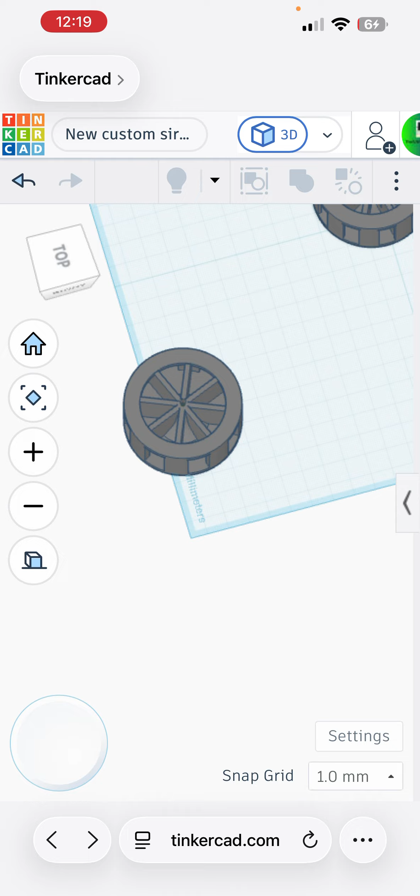But here we are, episode 2. Last episode we modeled the 8-port rotor - I almost said 10-port rotor. This time we're going to model the stator.

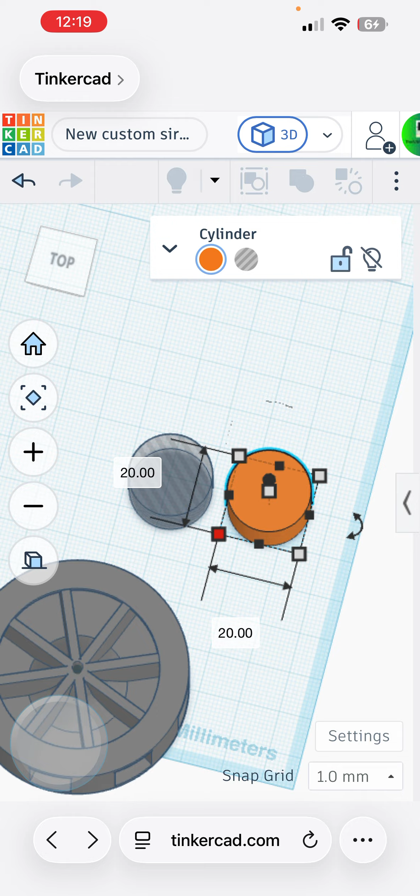Yay, wrong thing to grab. I'm just going to get the size for the actual stator walls and then the hole for the rotor to fit in.

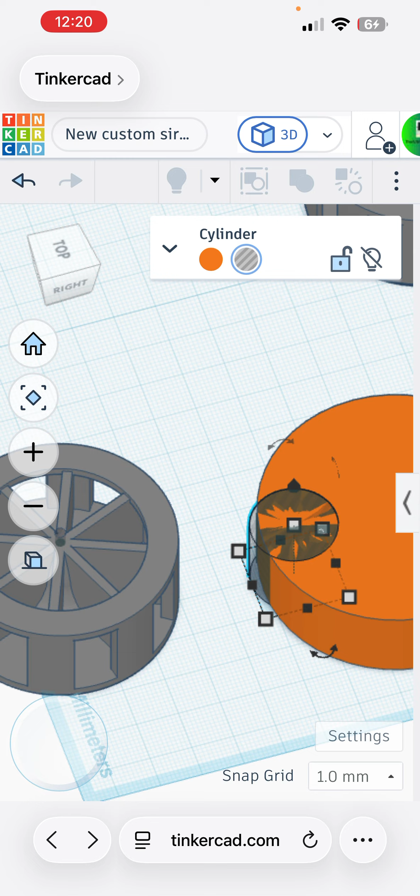I forgot what I was doing. All right, I'm just gonna have this 63 by 63 for fun, and also because of how big the rotor is. Yeah, 53.5. I have this 56.5 or something. Yeah, 56.5. We'll see how that goes.

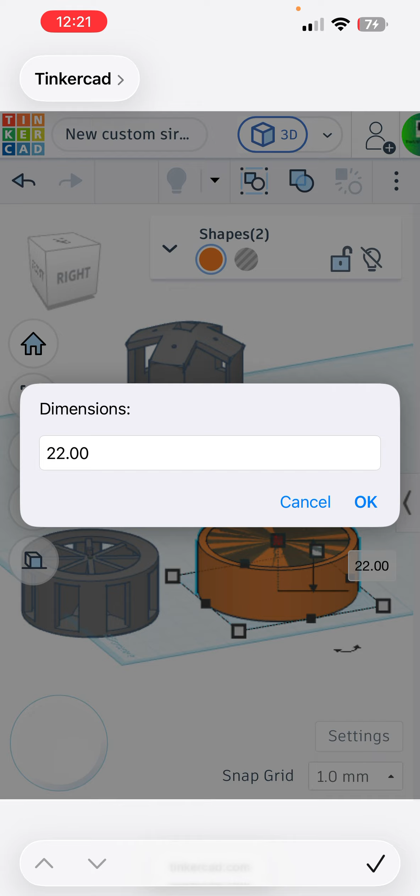I think the height was 22, okay. And my stuff froze. Oh, Lord.

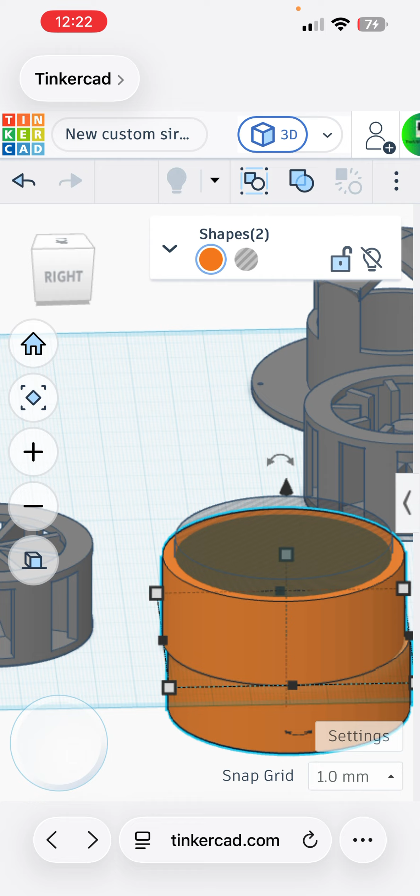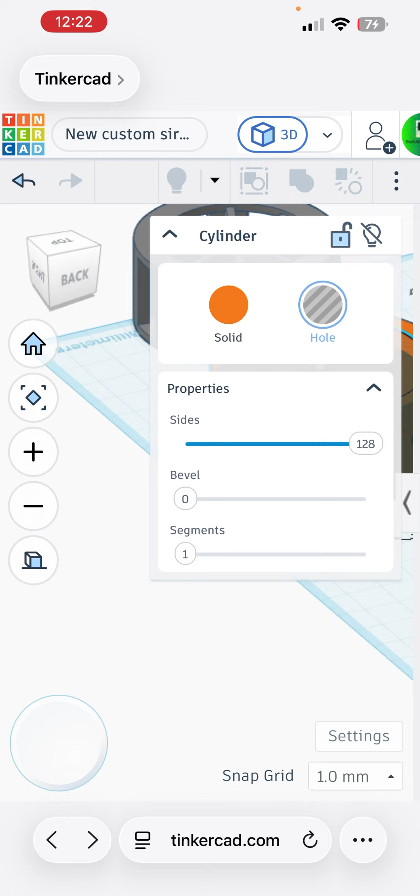Okay, so that is the base, and of course, I have to do this before I forget again. Remember last episode when I forgot to... I'm sorry, what?

Okay, so apparently I accidentally moved it. Oh my god, hummingbird, and I missed it. Hummingbird! Okay.

So, yeah. Currently I'm chewing gum, so I'm not going to be talking as much. So, yeah.

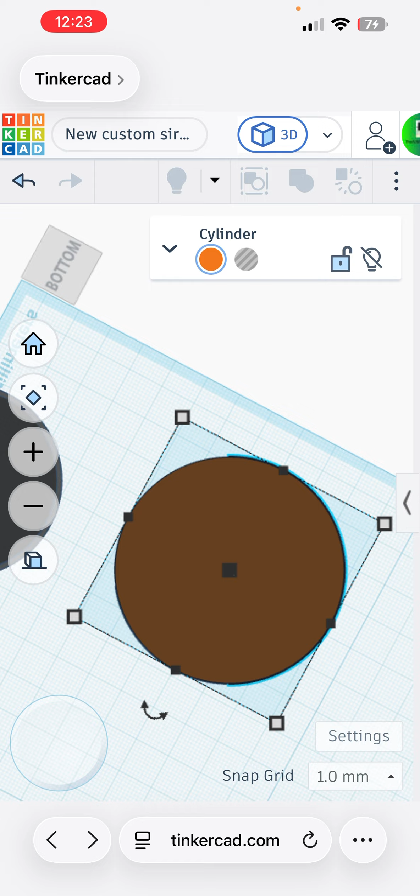Since the stator is practically done, I just gotta fix the size of this. I'm probably going to make it slightly larger. You know what, I'll have it the same size as it is currently. I'll just bring this down to like 25.

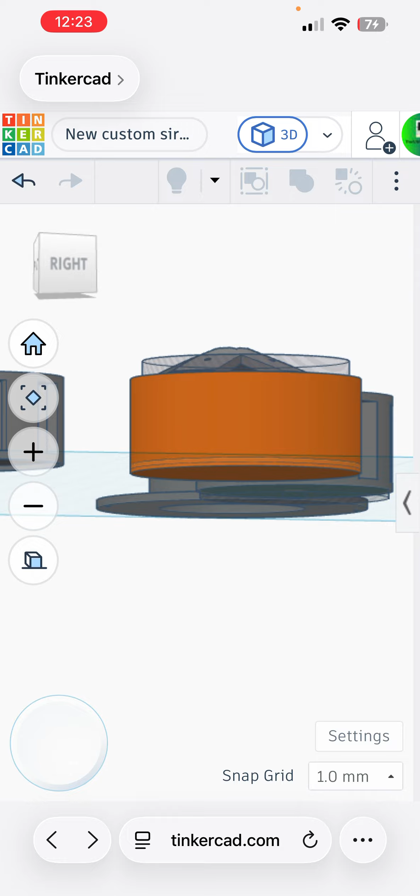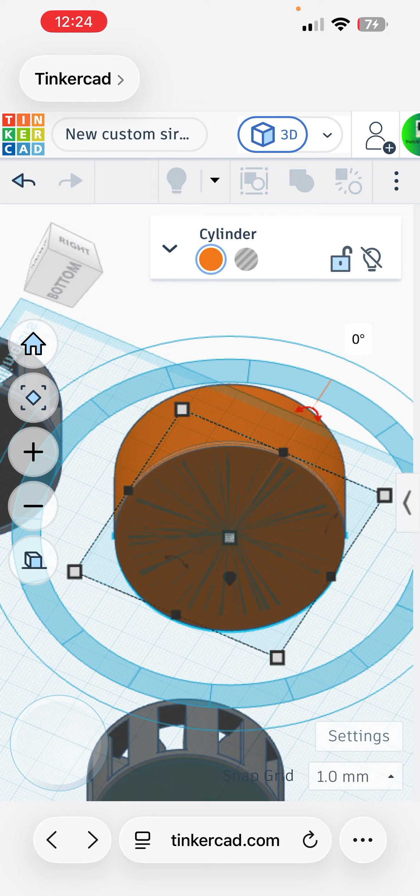Boom. Can I please just lift this up? Boom.

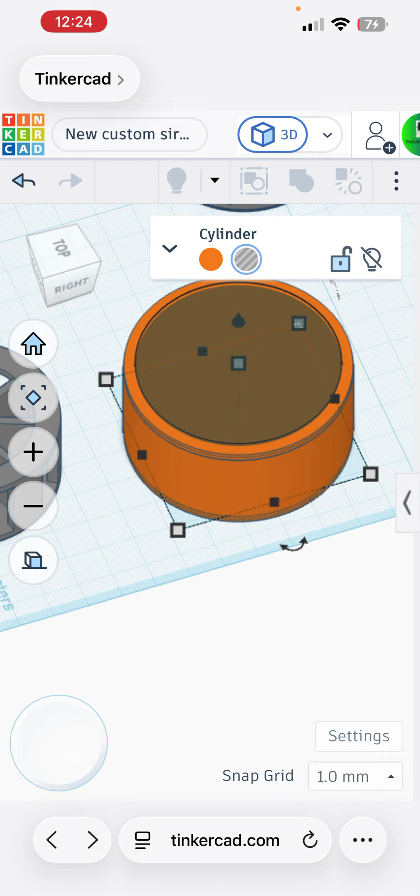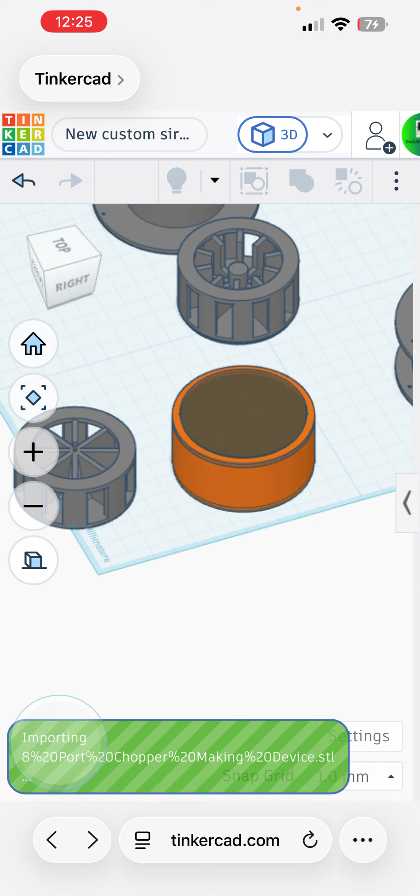Oh wait, I can just import. Y'all remember this from last vid? Yeah. I still gotta size it down every time.

B, come on, it's starting to rain. Get under here. I'll have this 60 by 60.

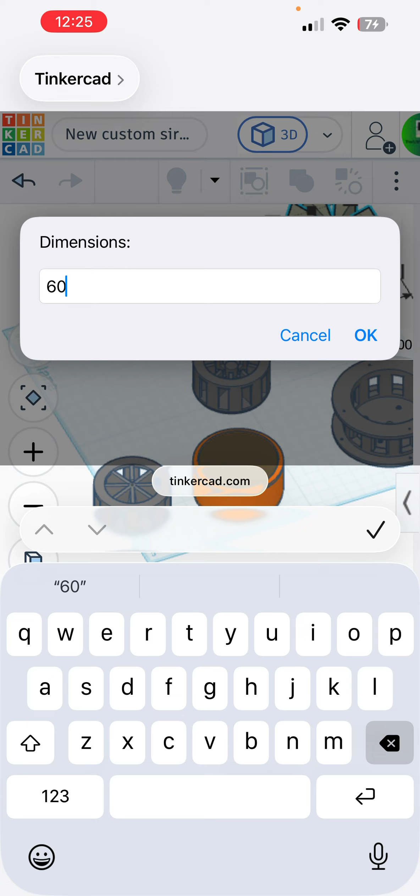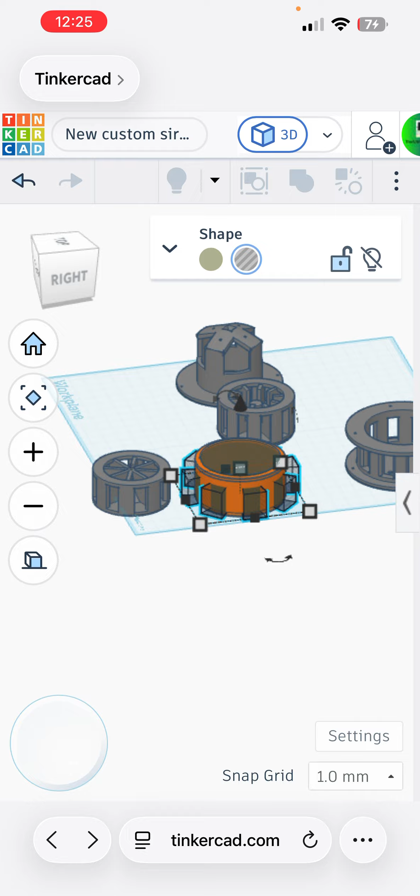Okay, I gotta chill out. But seriously though, that thunder is crazy.

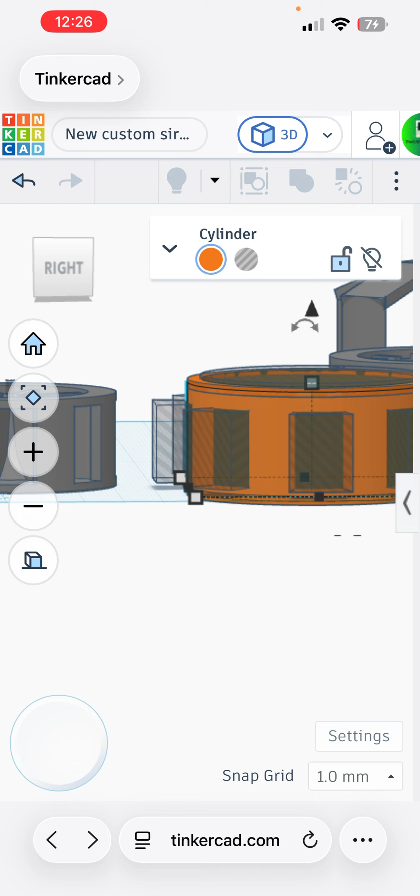No, I wanted this. Oh mate, can I please? Thank you, mate.

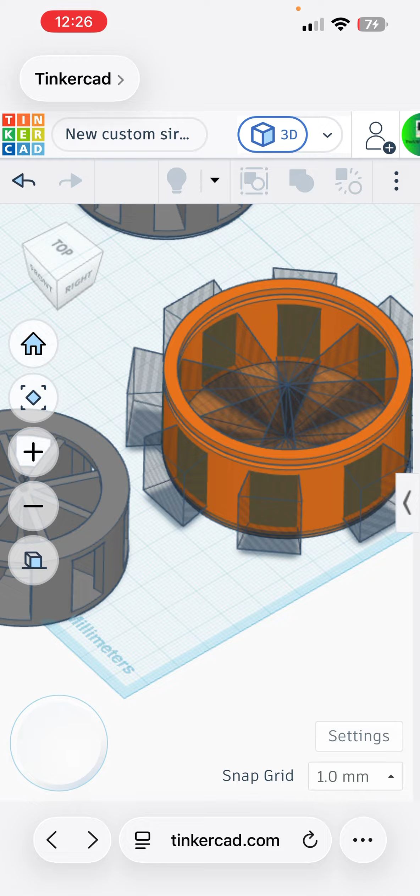Okay, all seriousness though, here's the stator. It's almost done already. All that's left for me to do is just bring this down, or at least eviscerate it.

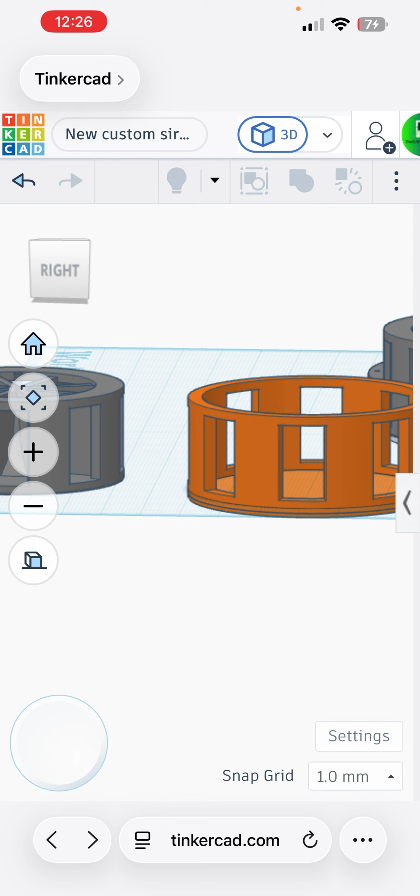Boom. Boom. Meet the stator. It's not completely complete, but it's something. Oh, Lord.

Now I'm trying to just make the rotor and stator and then think about the design later. Either it has an intake or not. So it is supposed to have an intake regardless, but I'm trying to think of a good design to have it.

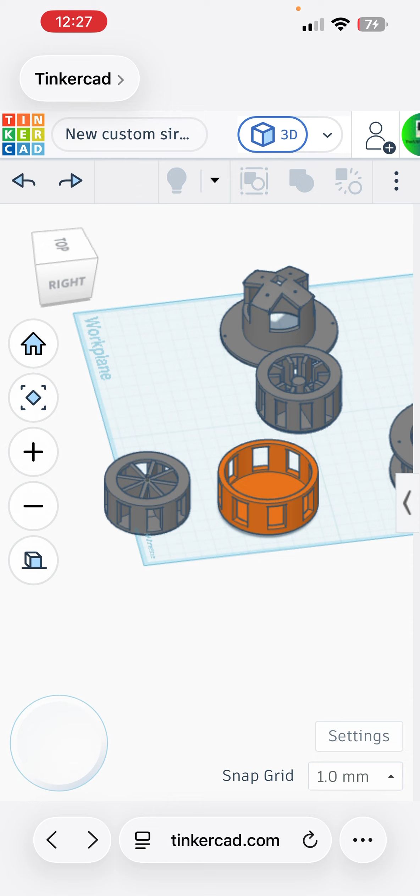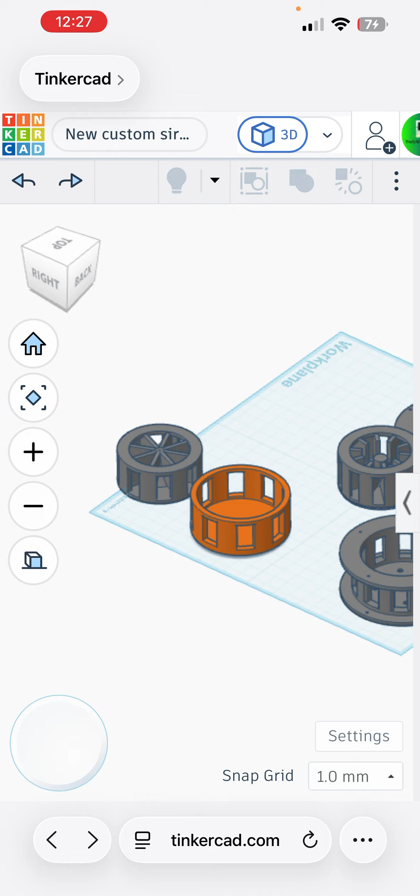So right now I'm thinking of a good horn design, and I have a weird square horn design that's not really circular, but I'll have a circular horn design. Don't worry guys, I'll have a circular horn design for people who don't want square horns.

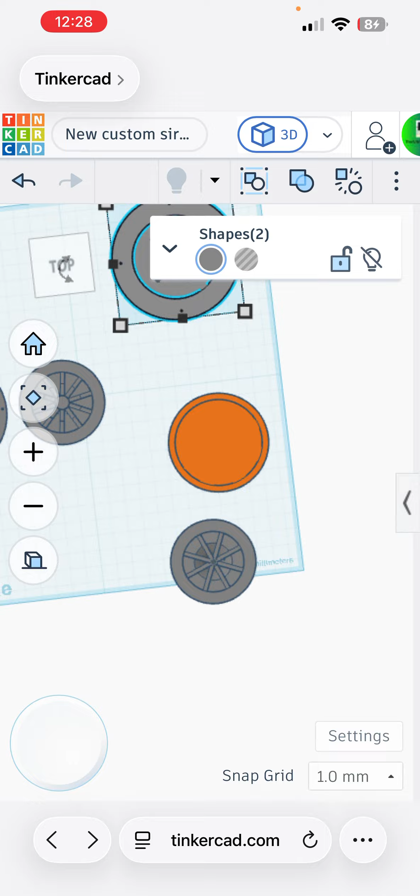I'm trying to think real quick. I'm not done with the stator yet, so I'm still going to work on it. But I will take some stuff off of this. No, eviscerate that.

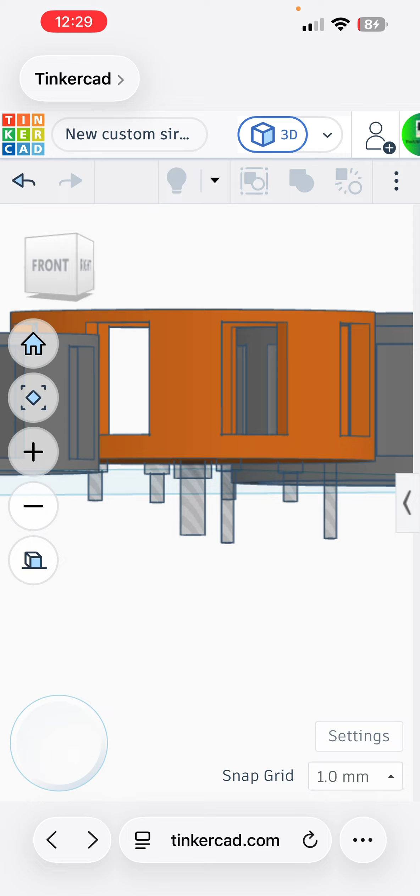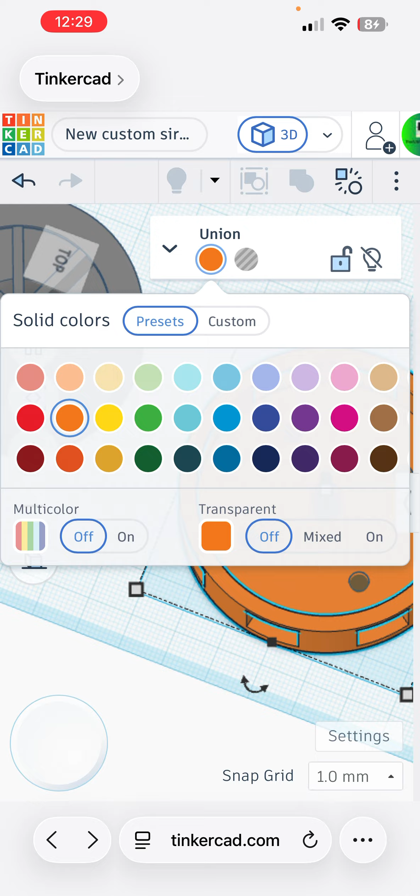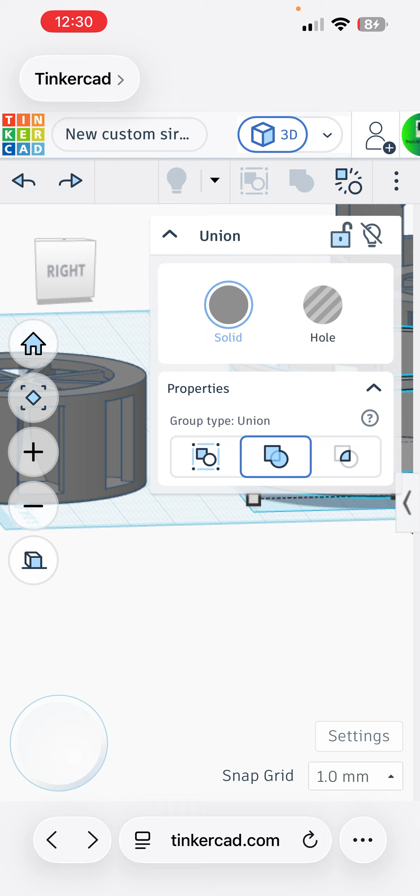I'm going to change the color of this to gray again, but this time a different gray. Just so you know, it is actually a different shade of gray. This is 60 brightness, and this thing's brightness is 57 - not too far apart, but isn't exactly the same. Probably should have done that first, but oh well, it doesn't matter.

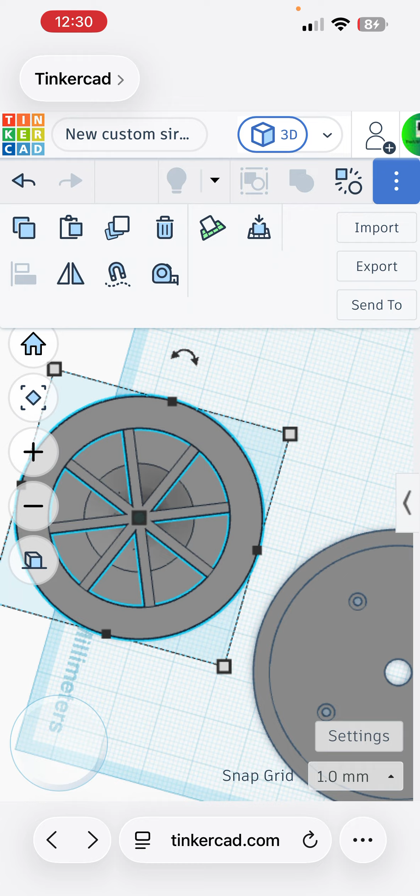Now let me test fit that rotor after I put the shaft on. And now we can test fit that rotor, see how it looks inside the stator.

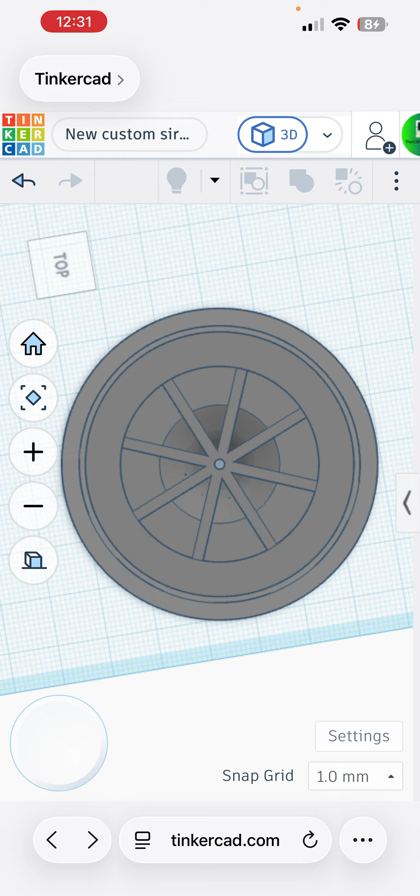I think that's a little too far apart, so I'll make the hole size slightly smaller. That way it doesn't look like this. But yeah, it looks good regardless. It's just too small or too big of a tolerance.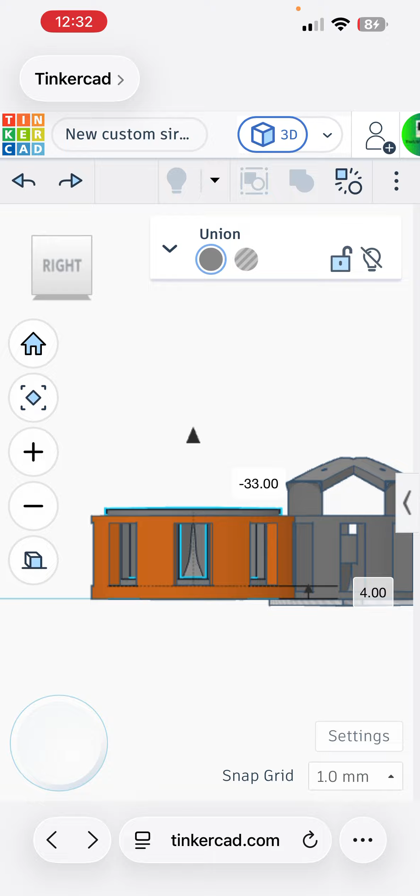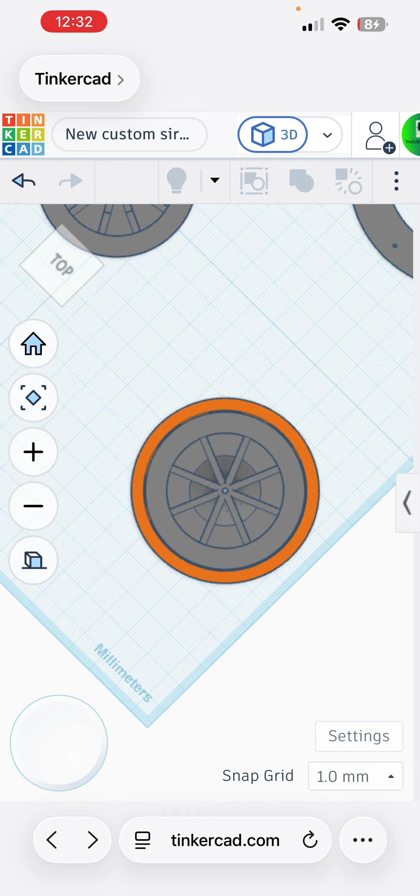Now that's a good tolerance, I think. Anyway, so now all that's left for me to do is just ungroup this stuff again.

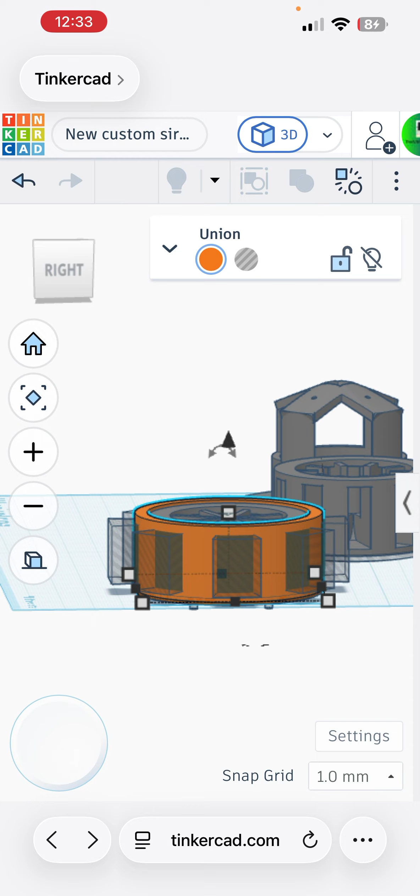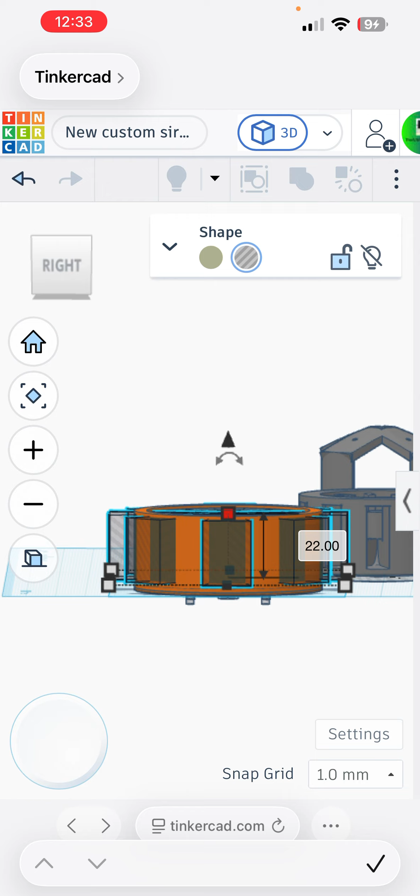Just make this slightly taller.

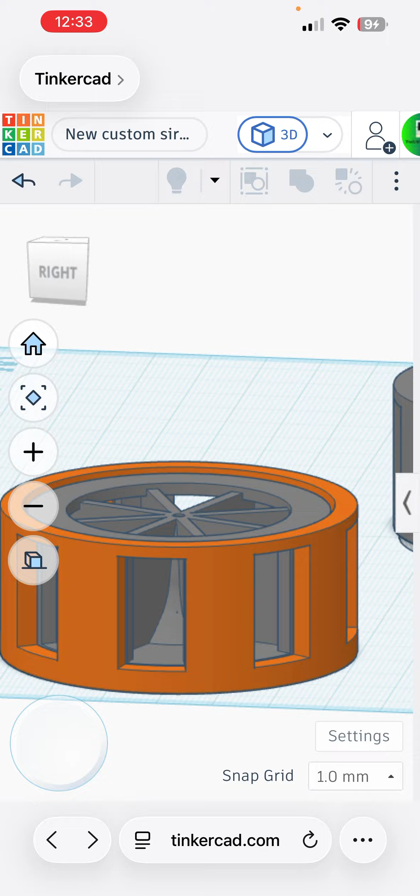Now that stuff is fixed, there's the stator. Now all that's left for me to do is figure out how to make the horns, which is not going to be too hard. I'm lying, it's going to be pretty hard. But we'll just worry about the stator and the intake today on this video instead, so yeah.

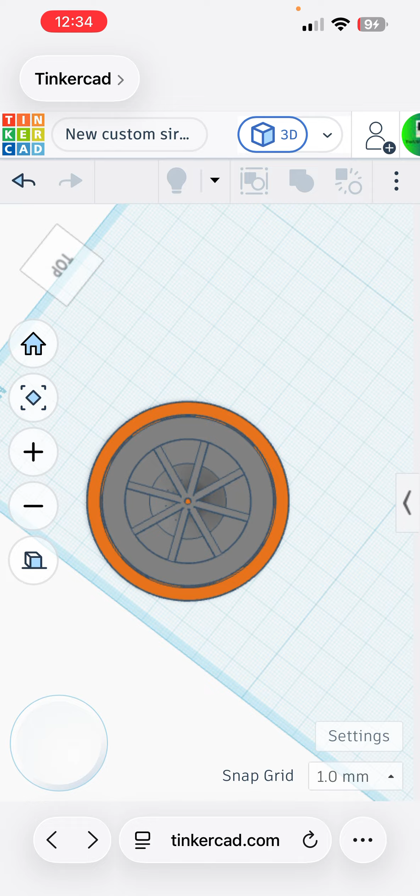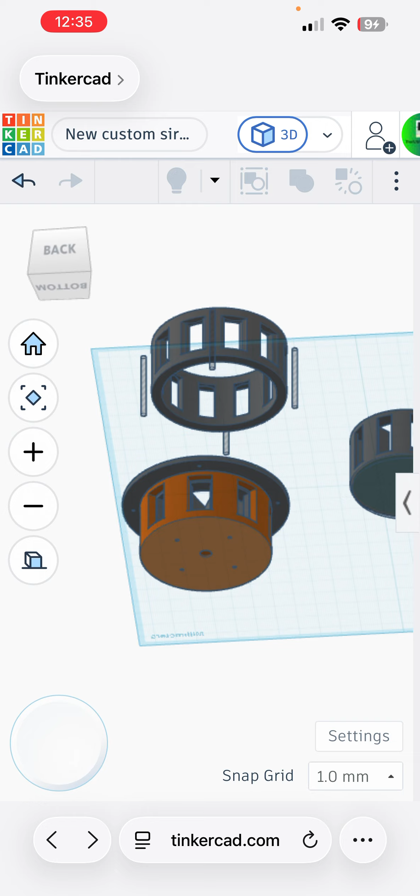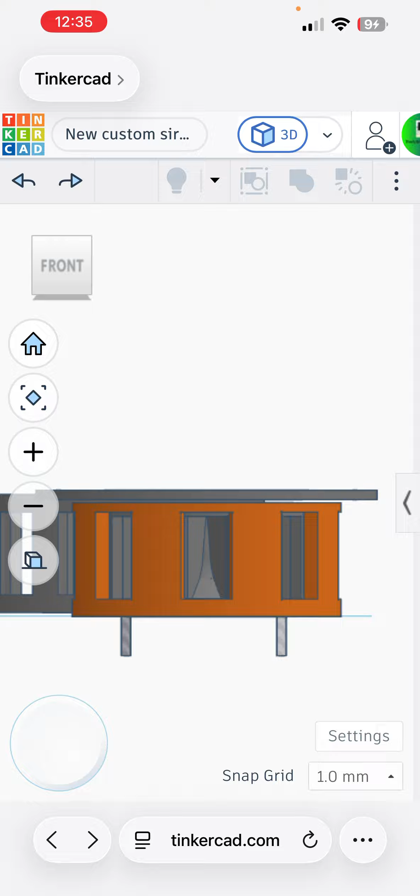Now I'm trying to think how I'm going to do this. I'm going to steal this. I'm just going to steal that from the C18. And yes, that's actually from the C18, fun fact. I took that, or at least, no, I think I took that from the C10. Yeah, I probably took that from the C10.

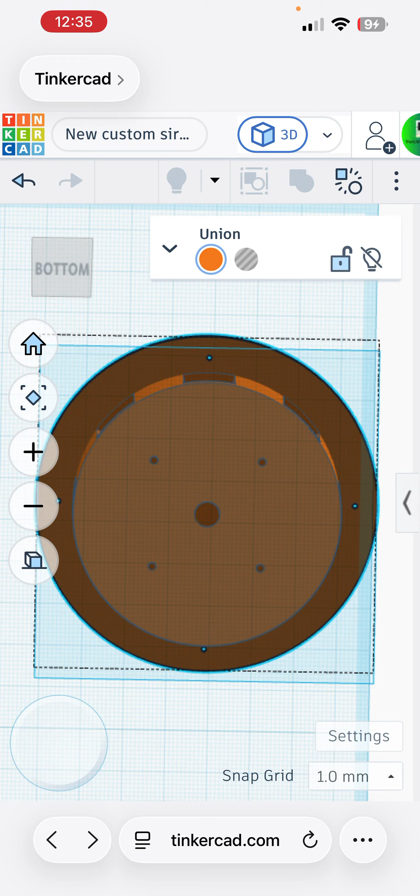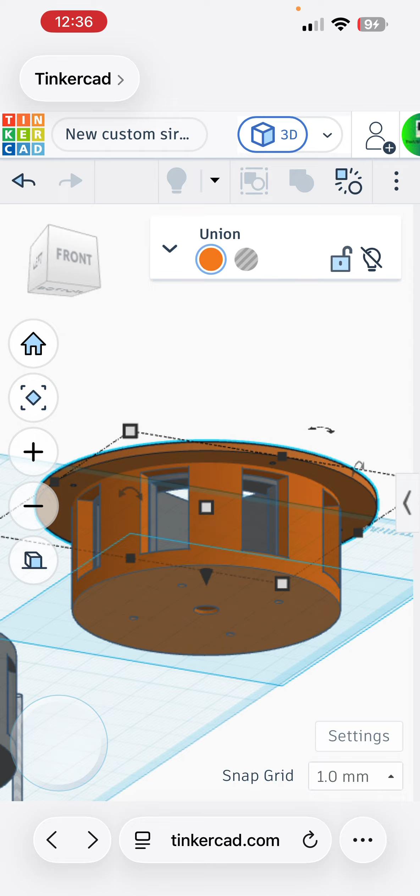If I take a quick sec to realize what I just did, I just got rid of the fact that this thing can actually have horns. So I'm going to get rid of some stuff. I'm going to ungroup it a couple times.

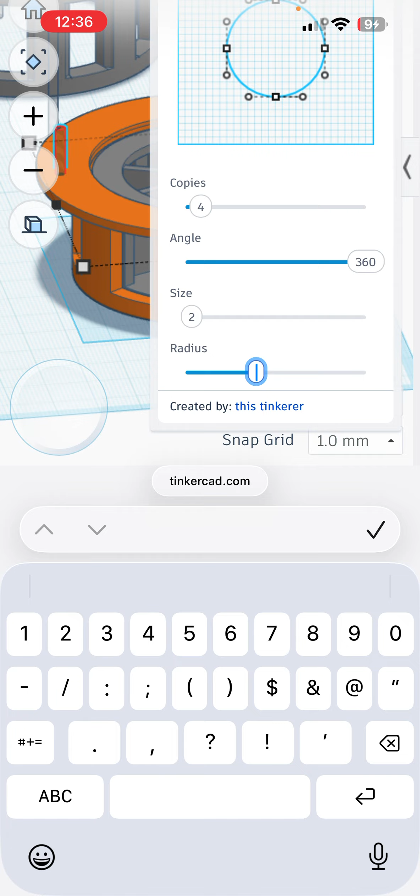This is what I needed. I need this to be 2, and the radius to be 20. I'm going to try a radius of 26. 28? If this isn't 28, then I don't know what else to do. So 29.

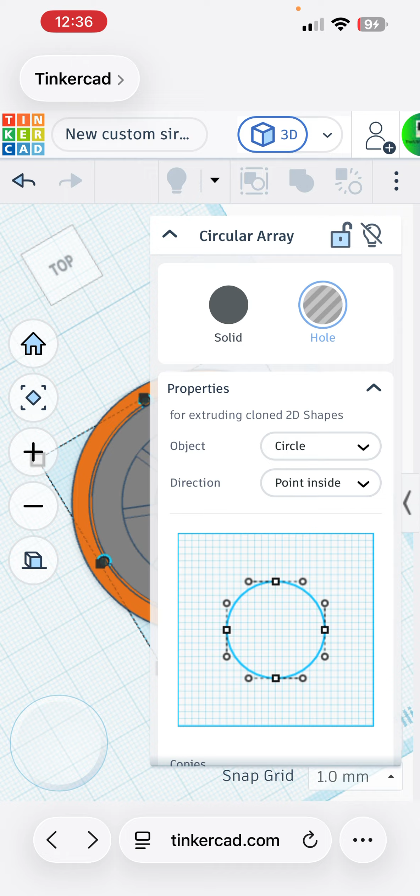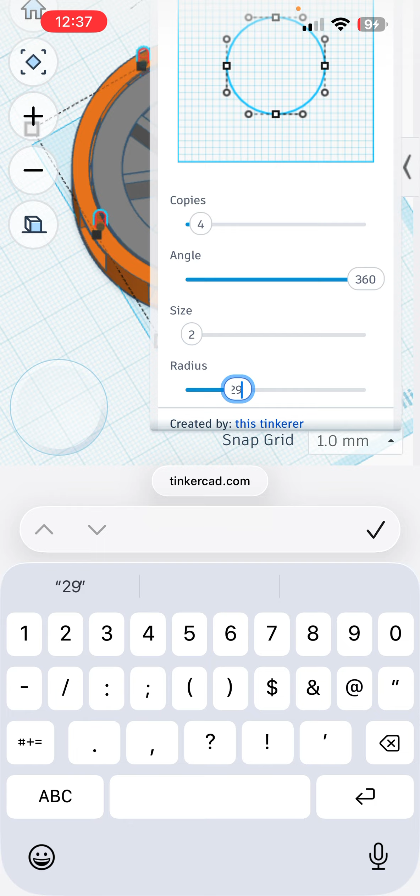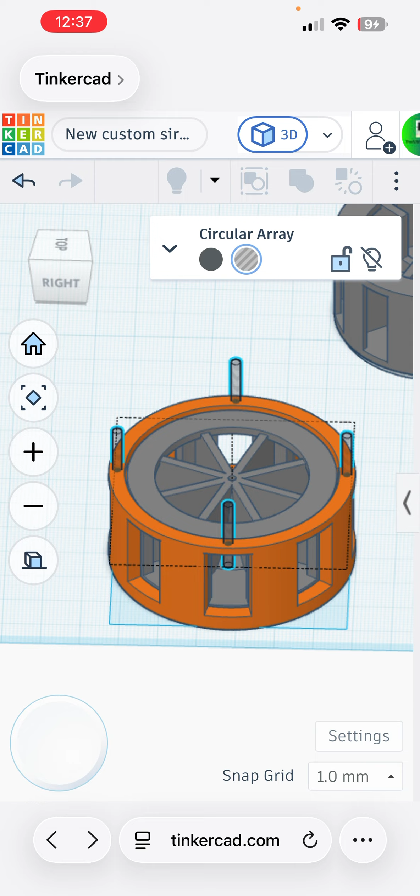Point 5. That kind of works, that kind of works. So that's good, at least. Hopefully. Yeah, hopefully that's good. Anyways.

So that's that. Now time to turn that into 8, because well, this is 8-port, not 4-port. And I'm going to do something kind of like STL10 horns, kind of like the thick horns on an STL10. I'm trying to do something like that, I guess, since that's the only way I can probably add horns, unless I'm going to go for like a sentry siren look.

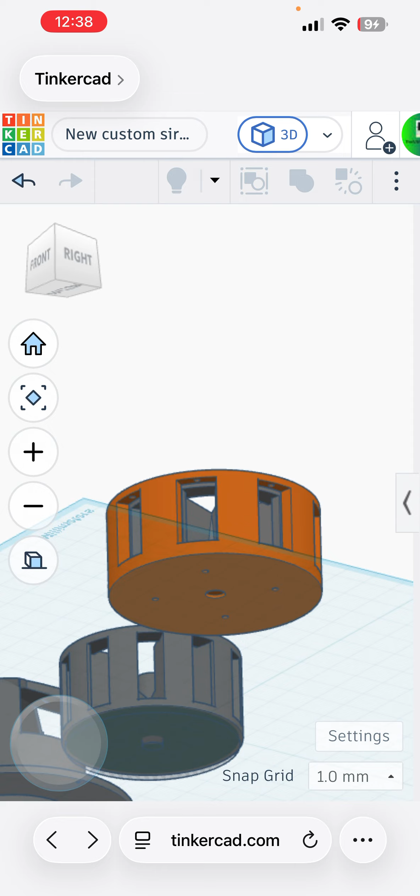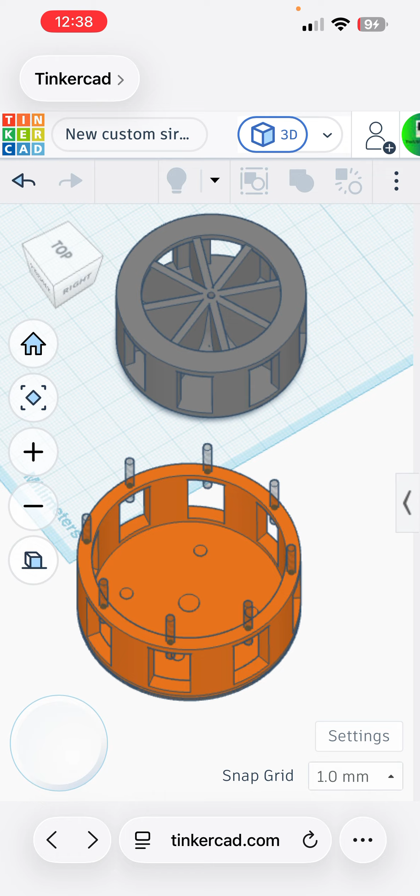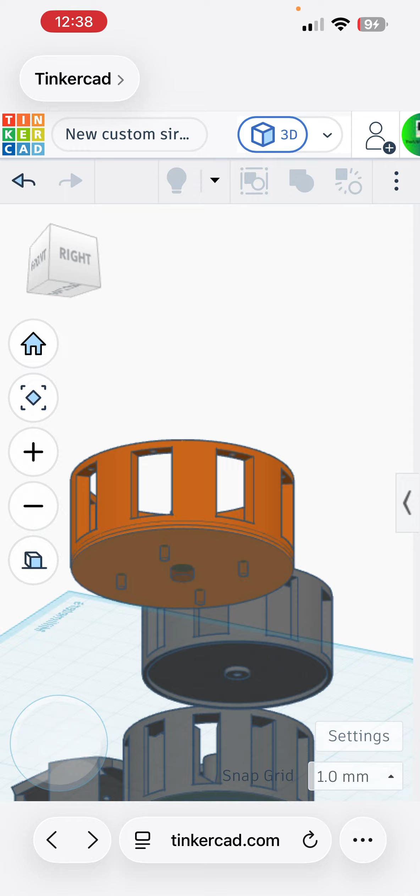So what the hell? There we go. Now that looks like an actual stator.

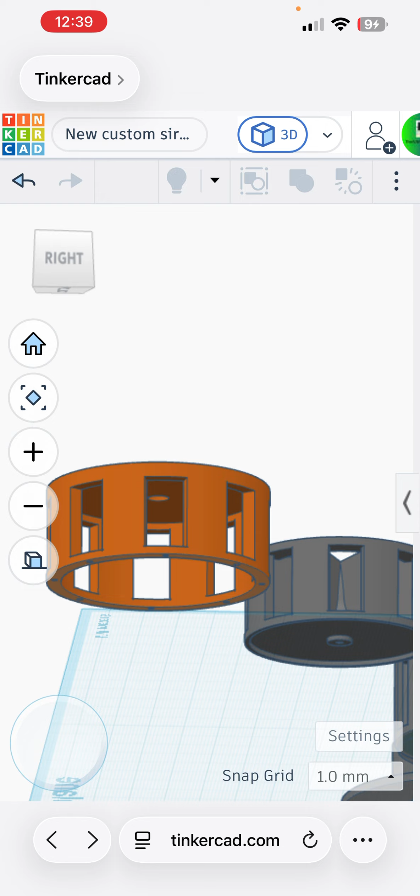Now I'm going to flip it upside down real quick, and yeah. I don't think I can model an intake fast enough, so I'll see what I can do, and then I'll end the video whenever I get done.

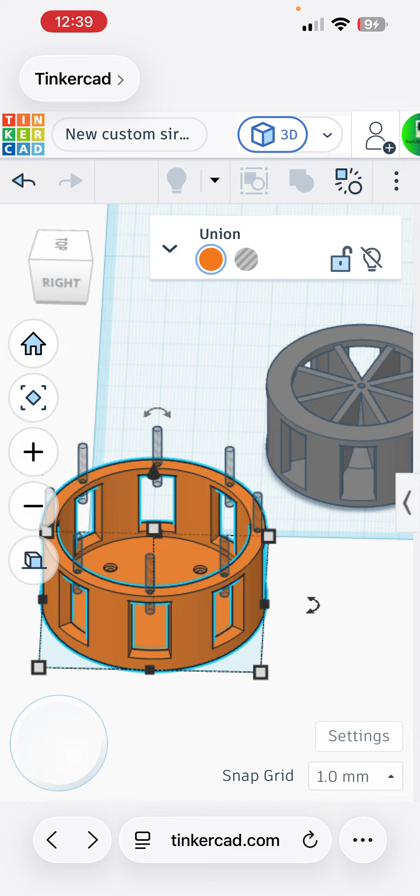So let me just ungroup some stuff. Duplicate that. Not duplicate it, but group that. Get one of these, get one of these.

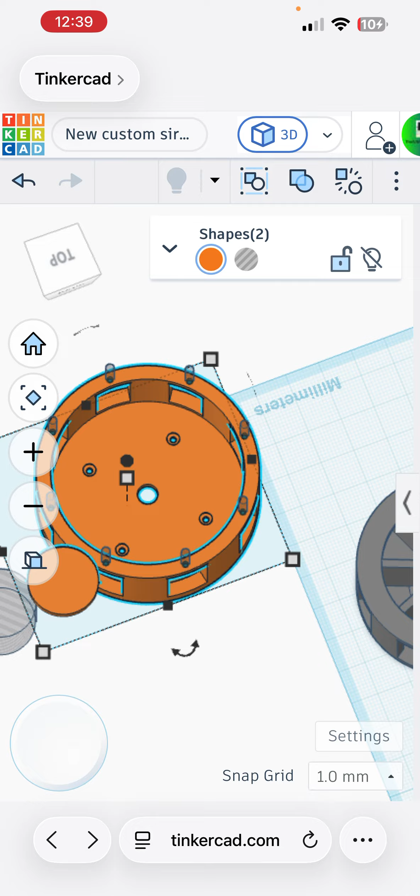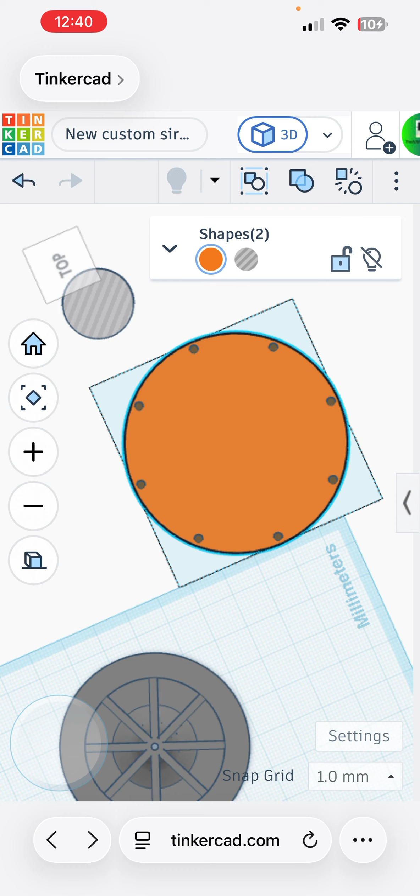Can you guys stop? I'm talking to my dogs. They're licking. River is licking my forehead right now. Don't know why, I really want to know why he's licking my forehead. Okay, you stop, but yeah.

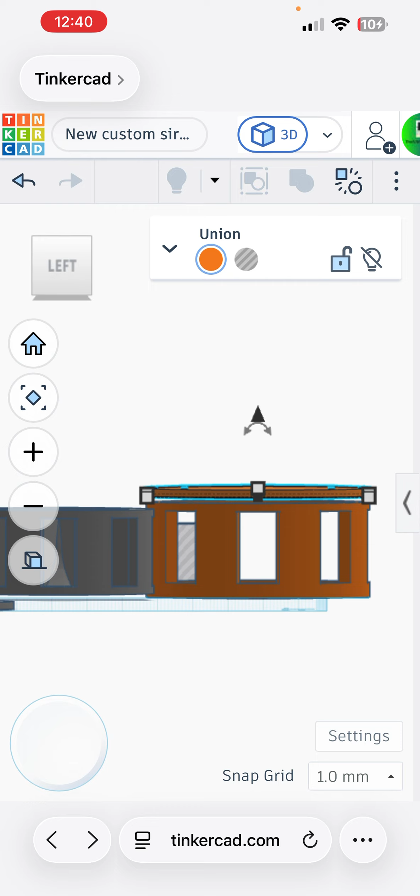River's an odd dog. Alright, so there's the stator, and the intake will go right here. So let me just ungroup that, and then the sides don't really matter, but I don't care. I'm still adding sides to be like this, so that way it's smooth.

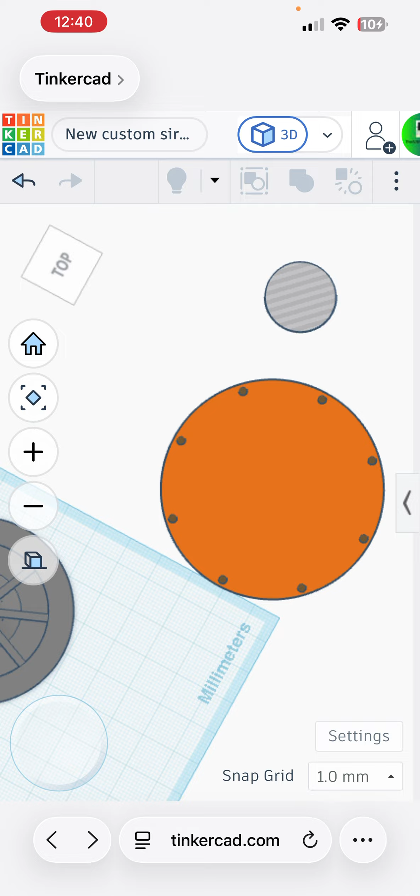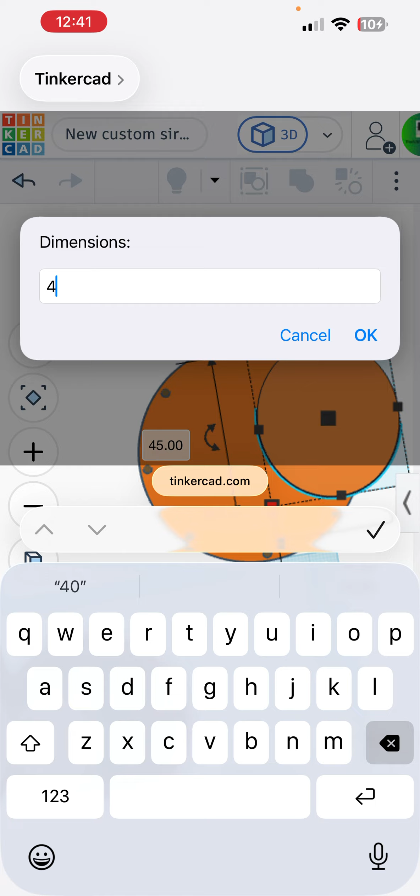Now the size of this will be roughly like 40 or 50. We'll have it 40 for a moment, and then I already know that's probably not even a good set. Yeah, so like 45 or something.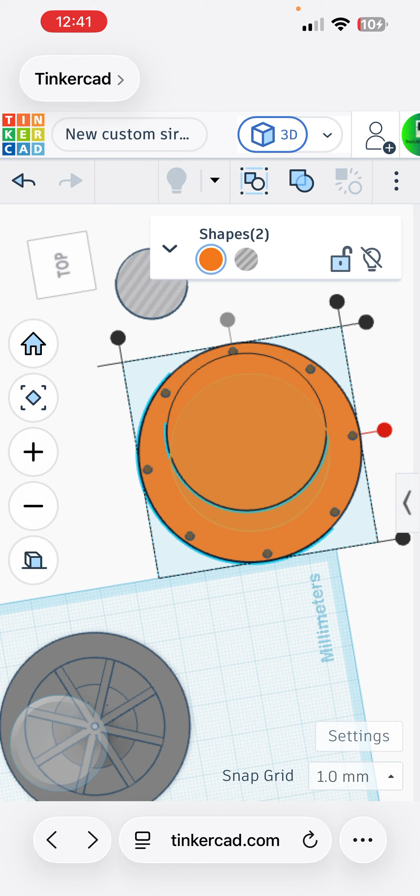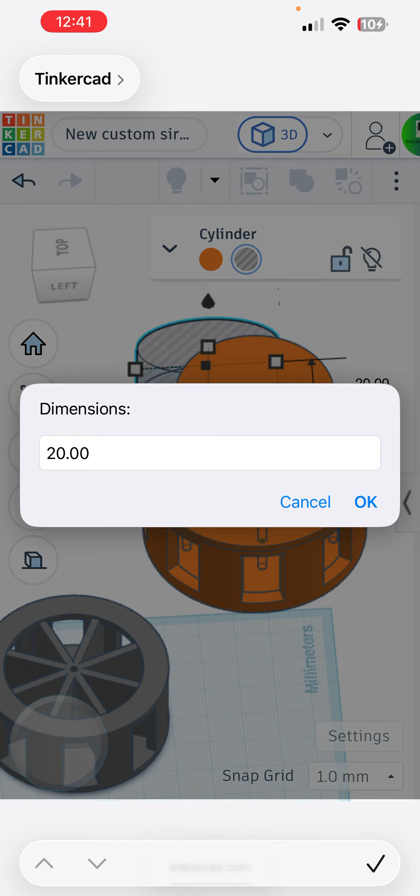So 45 by 45, and then the intake's hole block over here, this thing, that is going to be 40. And just so you guys know, this is actually pretty small. Like, actually small.

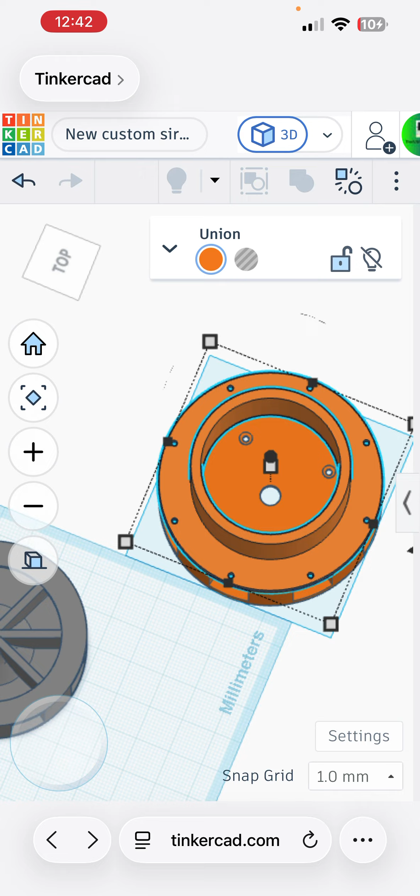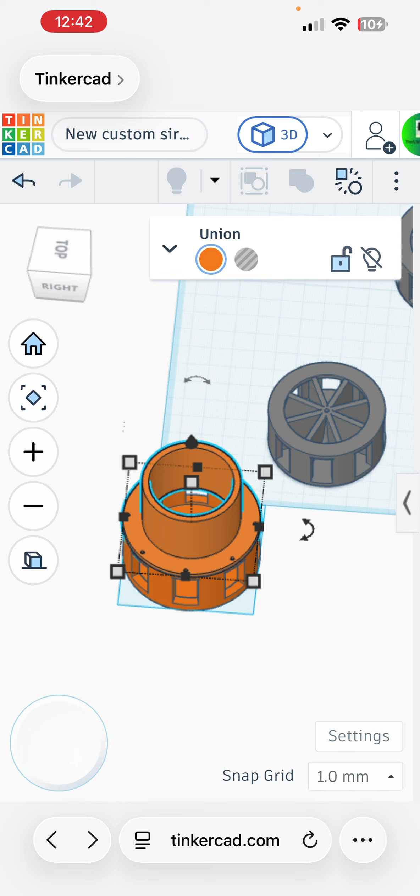Since I'm modeling this, I might as well also figure out how to model that 500 DHTT. Since DHTTs have 8 and 12-port rotors, I can model the 12-port and the 8-port.

Oh Lord, B, get under here. Come on, she is unfazed.

Yep, I'm checking weather. Thunderstorm, okay.

So there's the intake, I think I'll go now. I don't think I'll add legs just yet, but there's this. Anyway, bye guys.